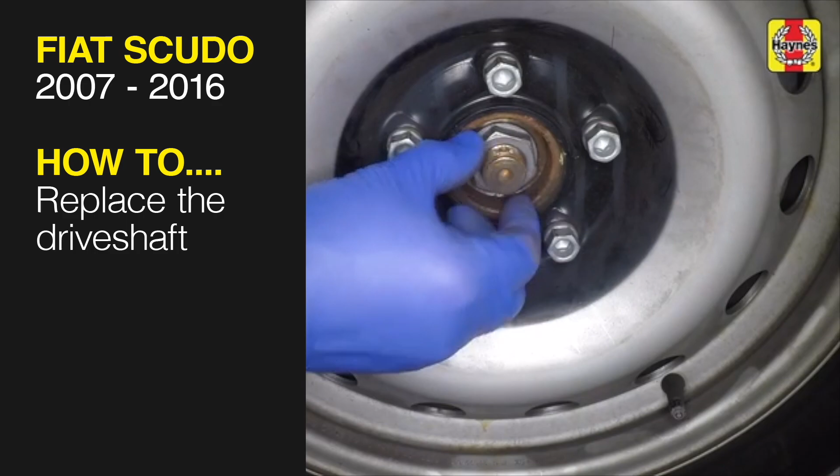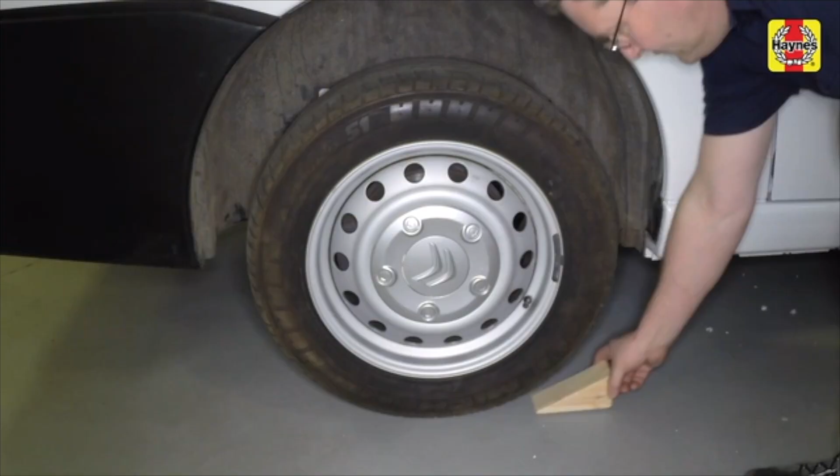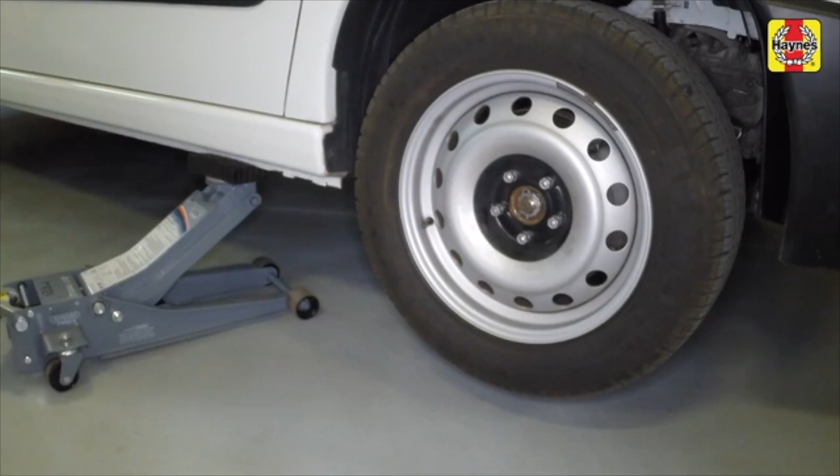Driveshaft renewal. Before proceeding, check that the handbrake is fully applied. Chock the rear wheels. Remove the front wheel trims and slacken the wheel bolts. Raise the front of the vehicle using a jack. Support it on axle stands.

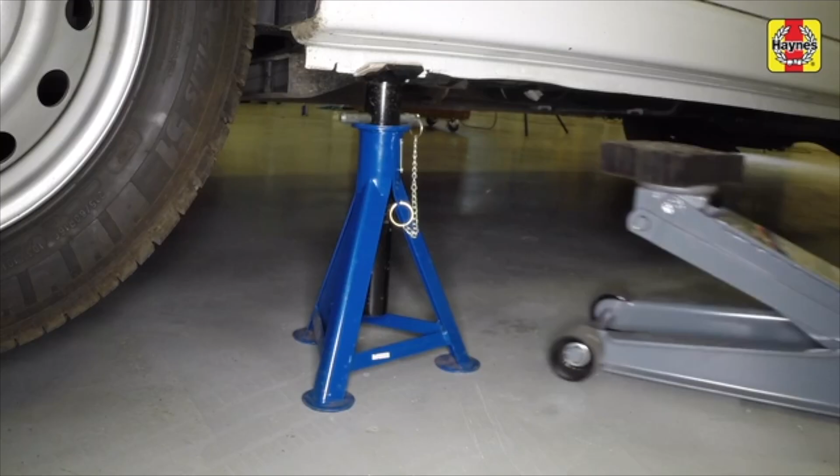Lower the vehicle onto the axle stands and remove the jack. The front wheels can now be removed from the vehicle. Pull out the R-clip securing the driveshaft nut and remove the hub nut locking cage. Refit the wheel and tighten the wheel bolts.

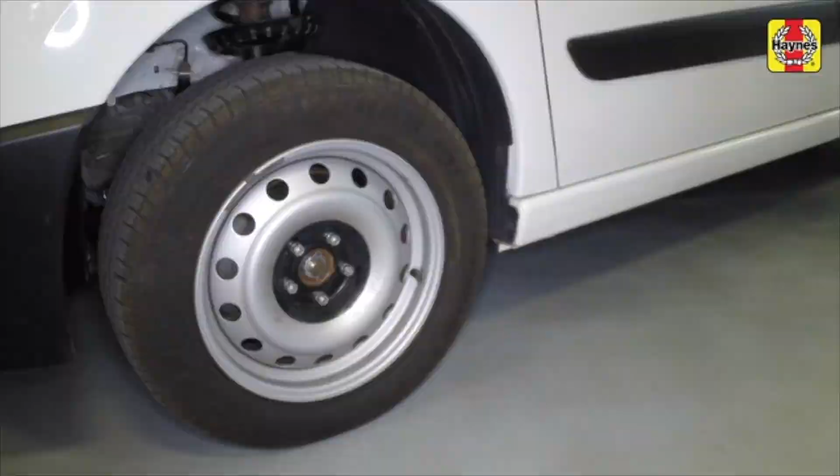Raise the vehicle using a jack. Remove the axle stands and lower the vehicle to the ground. Remove the jack. Slacken the driveshaft nut. Remove the front wheel trims and slacken the wheel bolts. Raise the front of the vehicle using a jack. Support it on axle stands.

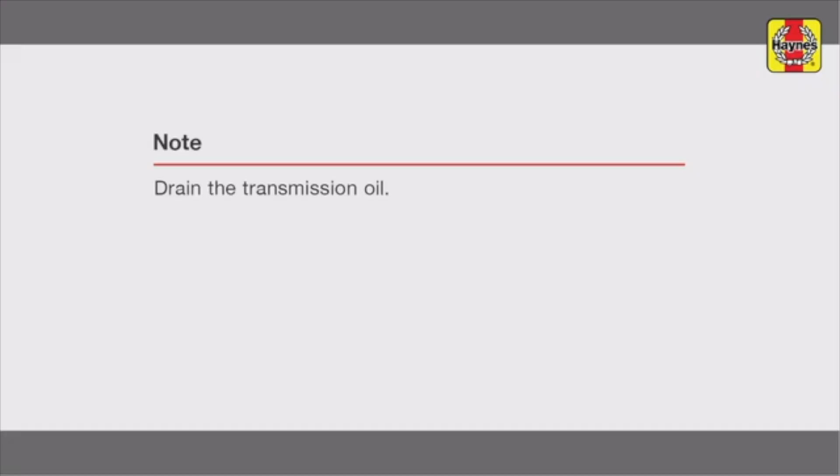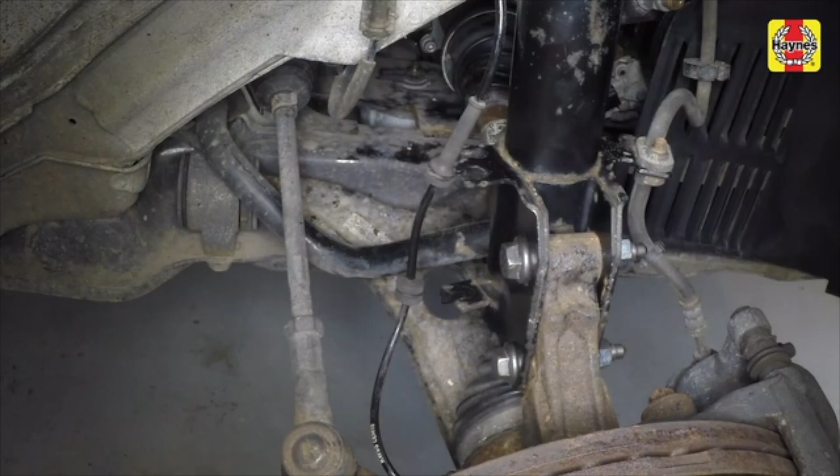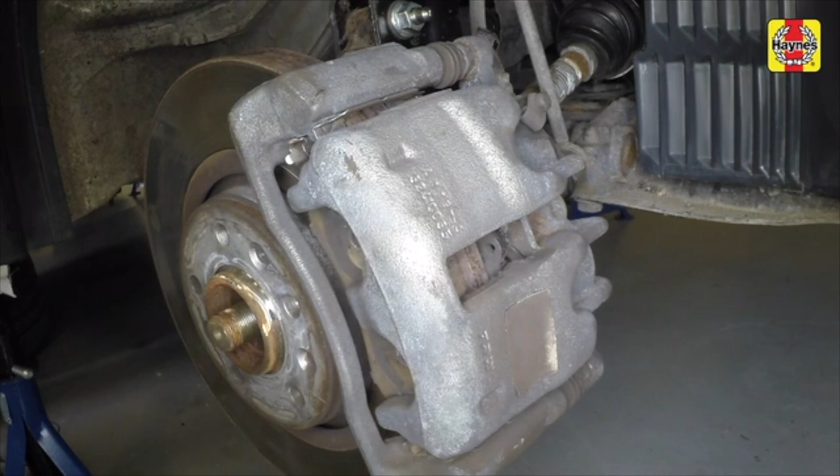Lower the vehicle onto the axle stands and remove the jack. The front wheels can now be removed from the vehicle. Unclip the wiring for the ABS wheel speed sensor to make sure it isn't damaged as the hub assembly is moved. Remove the driveshaft retaining nut. Undo the brake caliper guide pin or guide pin bolts.

And slide the caliper from the disc. Suspend the caliper from the suspension coil spring using a cable tie to prevent straining the brake hose. Discard the guide pin bolts because new ones must be fitted. Undo the nut and disconnect the upper end of the anti-roll bar link rod from the suspension strut. Slacken the track rod end nut.

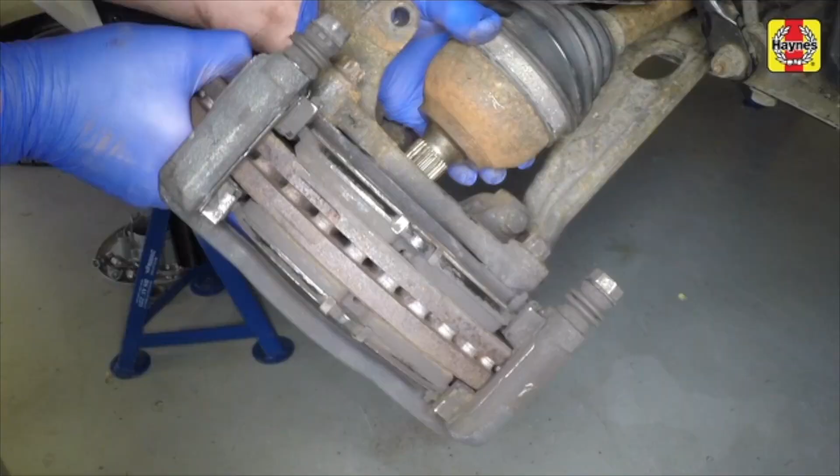Then undo the retaining nut and, using a ball joint separator tool, disconnect the track rod end from the hub carrier. Slacken and remove the two bolts securing the hub carrier to the base of the suspension strut. Note that the strut to hub carrier bolts are inserted from the rear. Tap the shaft from the hub and pull the hub carrier outwards to free it from the strut.

Remove the shaft intermediate bearing retainer upper bolt and then remove the lower bolt and remove the retaining plate. Carefully pull the swivel hub assembly outwards and withdraw the drive shaft outer constant velocity joint from the hub assembly. If necessary, the shaft can be tapped out of the hub using a soft-faced mallet.

Support the drive shaft and then lever the inner constant velocity joint from the transmission, taking care not to damage the drive shaft oil seal. Remove the drive shaft from the vehicle.

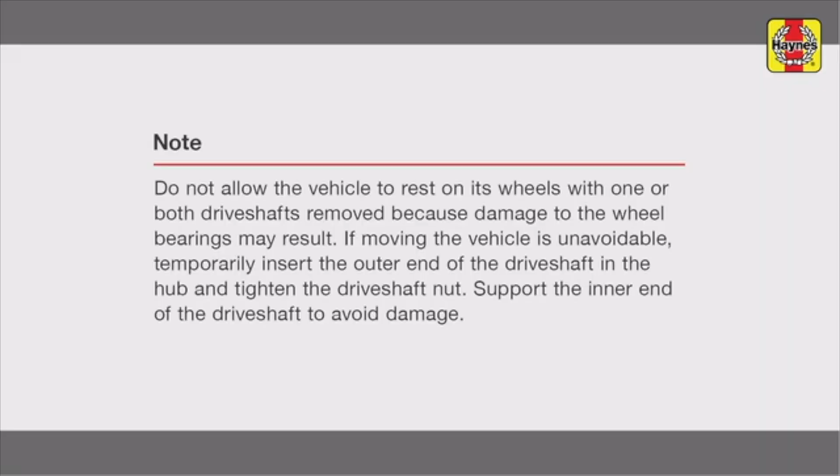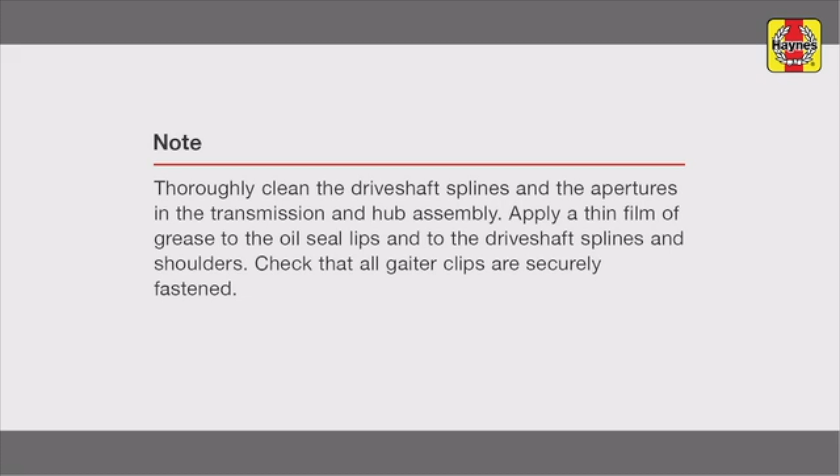Carefully locate the inner drive shaft splines with those of the differential sun gear, taking care not to damage the oil seal. Align the intermediate bearing with its mounting bracket and push the drive shaft fully into position. If necessary, use a soft-faced mallet to tap the outer race of the bearing into position in the mounting bracket.

Locate the outer constant velocity joint splines with those of the swivel hub and slide the joint back into position in the hub. Ensure that the intermediate bearing is correctly seated, and then rotate its retaining plate back into position against the bearing outer race. Tighten the retaining bolts. Where necessary, ensure that the dust seal is tight against the driveshaft oil seal.

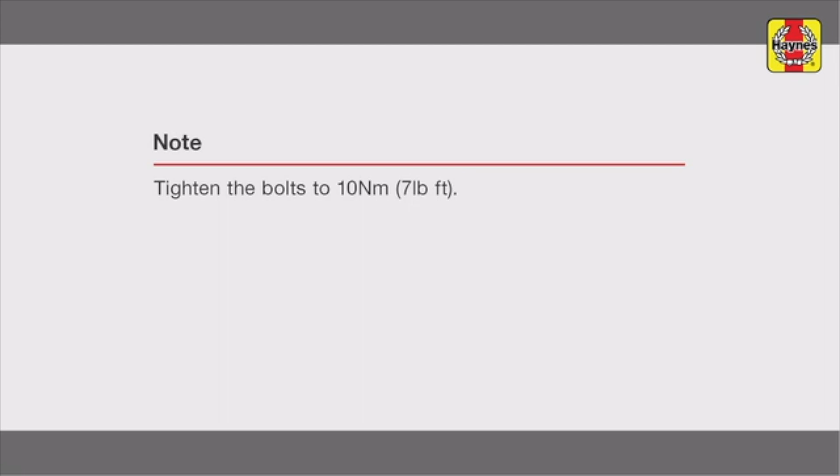Rotate the base of the strut 90 degrees and align the hub carrier with the brackets on the strut. Insert the bolts. Tighten the bolts using a torque wrench. Refit the track rod end to the stub axle and tighten the track rod end nut. Then torque the track rod end nut.

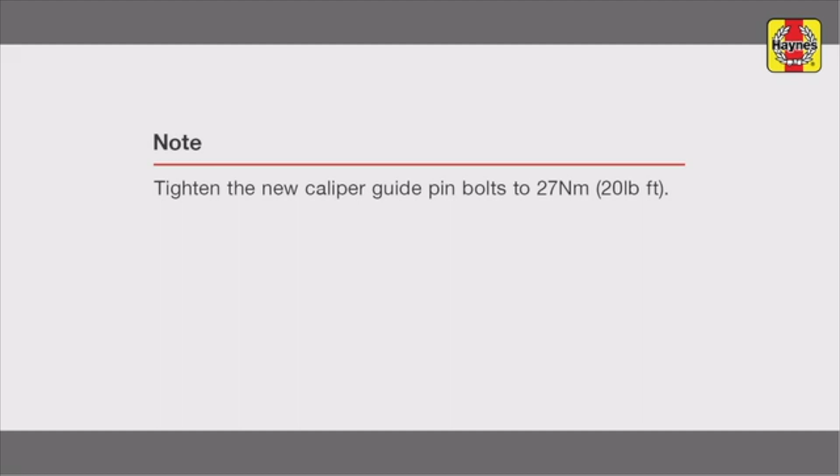Refit the brake caliper and insert new guide pin bolts. Use a torque wrench to tighten the caliper guide pin bolts. Refit the anti-roll bar upper link joints and tighten with a torque wrench. Refit the ABS wheel speed sensor wiring back into its retaining clips.

Lubricate the inner face and threads of the driveshaft nut with clean engine oil and refit it to the end of the driveshaft. Use the method employed on removal to prevent the hub from rotating and tighten the driveshaft retaining nut. Refit the wheel and tighten the wheel bolts. Lightly tighten the driveshaft nut.

Raise the vehicle using a jack. Remove the axle stands and lower the vehicle to the ground. Remove the jack. The chocks can now be removed from the rear wheels. With the vehicle lowered, use a torque wrench to tighten the driveshaft nut. Once tightened, make sure that the hub rotates freely.

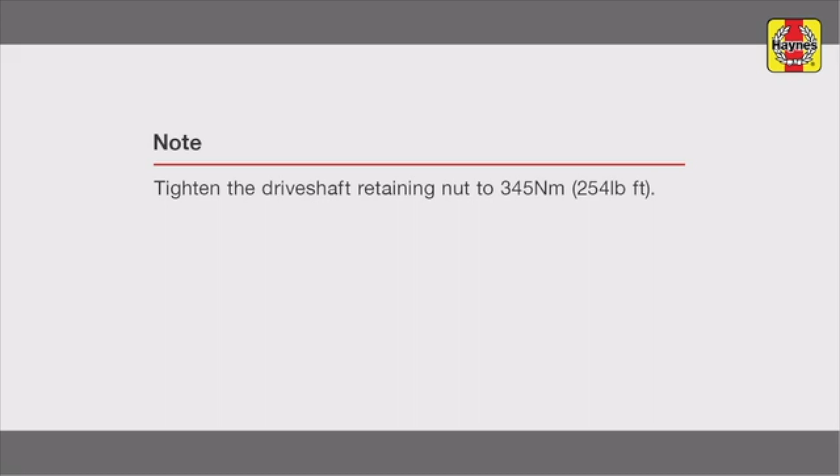Engage the locking cap with the driveshaft nut so that one of its cutouts is aligned with the driveshaft hole. Before proceeding, check that the handbrake is fully applied. Chock the rear wheels. Raise the front of the vehicle using a jack, support it on axle stands, lower the vehicle onto the axle stands and remove the jack. With the vehicle off the ground, remove the wheel.

Secure the cap in position with the R clip. Refit the wheel. Raise the vehicle using a jack, remove the axle stands and lower the vehicle to the ground. Remove the jack. Torque the front wheel bolts and refit the wheel trims. The chocks can now be removed from the rear wheels.